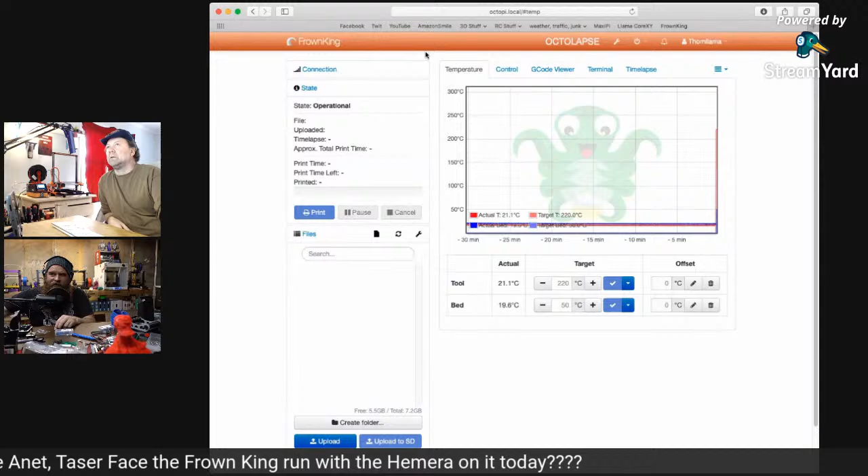Seems to be working, let's heat it up. Yeah, it's under, let's see, line number. That's one thing, people who actually know Marlin are like 'I know the line number.' I'm over here like, I can scroll to it.

Okay, stop sharing screen, let's see here. Oh, I can just do a Control F and then do bump. Oh, as long as I have that ticker going, we can't see our names. I gave you a bump of 2 millimeters on there.

Yeah, it needs to be more. I had that problem on occasion with it. I built in a fine adjuster for all my Z stops, you can't really see it because it's so far away. I do it with all my printers. The problem is the switch that came with the ANET, the stock ANET switch, has this really long handle on it, and it's not lifting it enough. It's super accurate, I found out, because it's so long it's finer at the actual switch. But it doesn't lift it enough to trigger it every time. It's right at that point where sometimes it works and sometimes it doesn't.

Yeah, I've been there. That's why everything's on sensorless and probes now. But then if the probe fails, it goes stupid. I can control F all day long. I can control F too. Actually, I can't, because sometimes they say F all the time anyway. I can't control it.

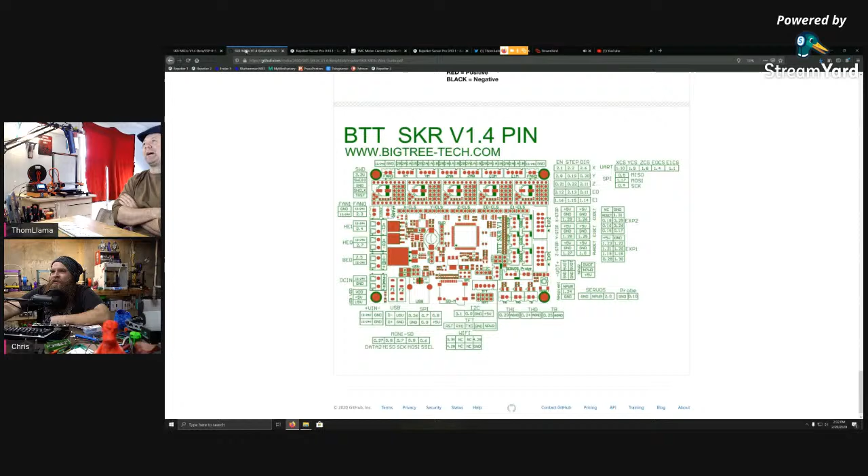Okay, that's climbing really slow even for this thing. Good, hopefully it just works. It should climb faster.

Is your screen still bugged out? No... oh, maybe it is. Huh, because I see me moving. I don't see you moving on my end. That's weird. I think my camera locked up.

Hey, it's me. And it's the llama, he's very dark, he didn't turn his lights on. Instead of a thermal runaway, he just shorted out all his house power.

I have mine hooked up to a Pi, so the Pi is mounted to the back of the 7-inch Pi screen, and that's it. I run them all on Ethernet, but you can run them on Wi-Fi, it's the same. And you can run it off like a cheap PC.

I've been pretty good, and we're back. Hey, it works, it was a Brave error. I've been playing with Brave browser. Oh, I have Firefox on this one. I don't like Chrome and I don't like Edge. You realize Brave is Chrome.

Well, sort of. If I open up basically 20 Chrome tabs, my computer doesn't struggle in Firefox. If I open 20 tabs in Chrome, I know, everyone loves Chrome. That's the only reason I keep going back to good old Mac Safari. Chrome is a freaking resource hog to the max. I mean, it works beautifully, but it's a resource hog.

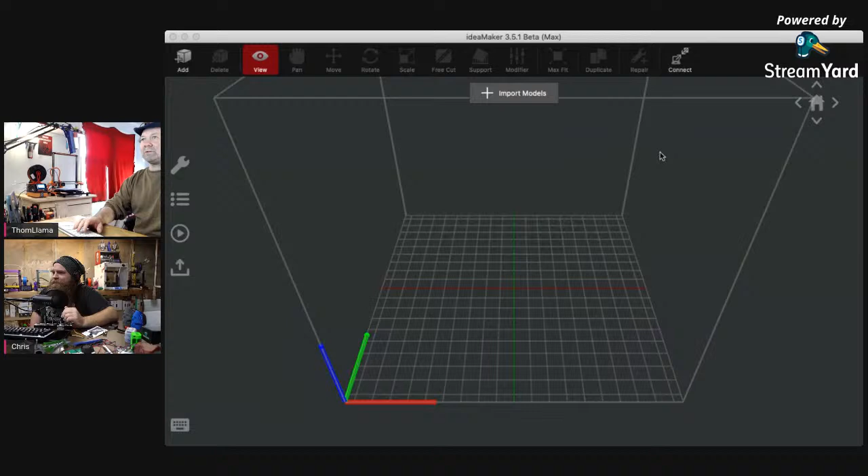Perfect. Advanced, general, what else am I missing? Rectangular, Marlin, distance from border - I don't care about that. This is... what's funny is I can't see your menu that you're clicking on screen. Oh, it's not showing up? No, I just see your mouse moving around. Well, I'll just share the whole screen then. I thought if it did the application window, it would work. Don't need that. Where's my ideaMaker again? There we are, now I can see it.

Okay, extruders 1, based on the PLA, default action, export to local disk, advanced. E-steps are fine, I'm not going to play with those yet. Primary extruder, everything's good. Continue. Finish. And there's my printer.

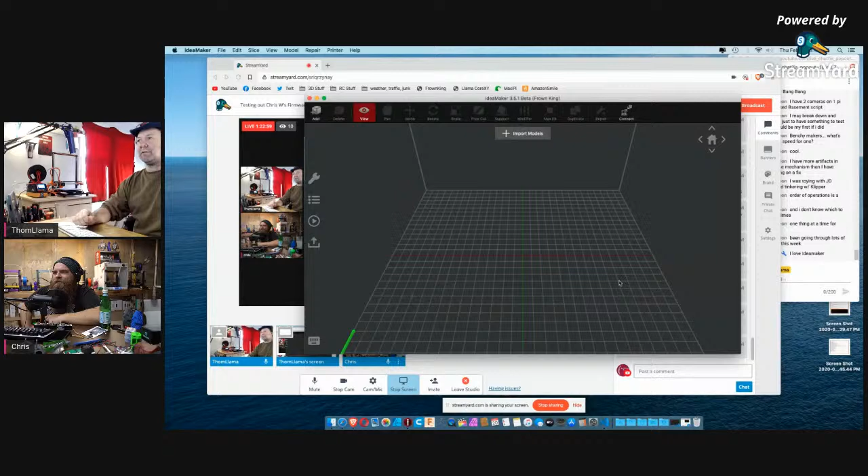That's how fast you set up a printer in ideaMaker. I just cheat in Prusa Slicer - I just go, I'm going to use this setting and just change a couple values for a new printer. They're all about the same. Everyone makes a big deal about setting up the printer, but the basic setup is just: what size is your nozzle, how big's your damn printer?

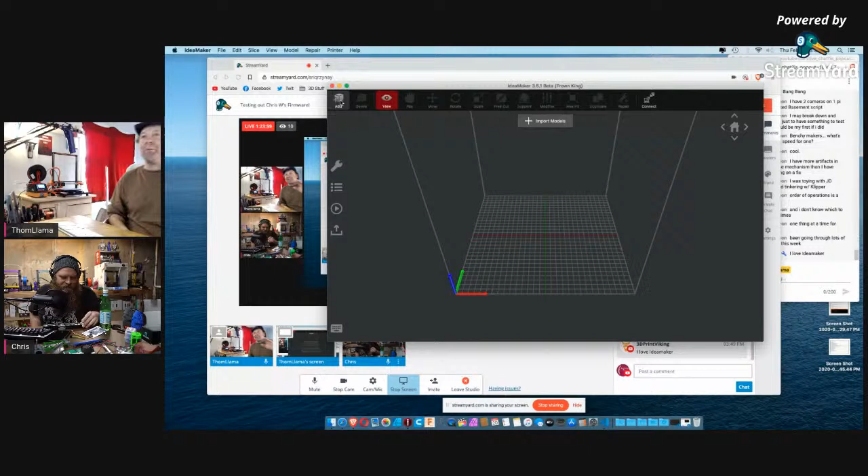Yeah, my issue with Prusa Slicer is there's no just like 'make a new printer profile' - it's always, I have to copy another profile and make it. I'm like, just give me a base zeroed value thing. ideaMaker does that similar, because most slicers slice according to your printer, but ideaMaker is all based on the filament. So all your filament profile is your whole profile. The only thing that cares about the printer is how big is it and how big's your nozzle - that's really it. Huge bed, whatever - it's all it cares about on your printer. Everything else is based on the filament.

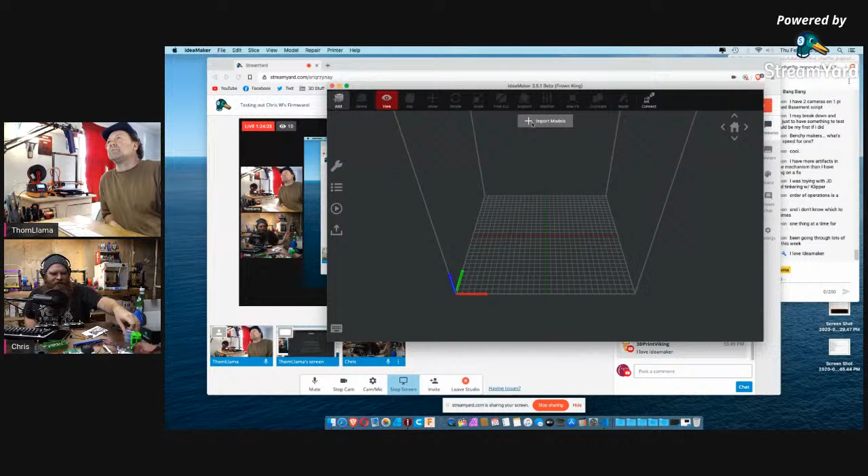But you can't even start until you base it off of one of their filaments. Yeah, I saw that - everything in the world is based off of one of their filaments. Now you can edit it and everything, but I don't want to base off your filament, I want to start with my own from scratch. Yeah, I just want a zeroed value thing. It keeps warning me when I forget to add something, which is just a pain in the butt on them to make. Gosh, I get so much... where is it?

Z-stop mirrored, that's the one I want. Because my Z-stop arm did not print so well, I was using the crappy filament. So I'm going to print my own new Z-stopper guy.

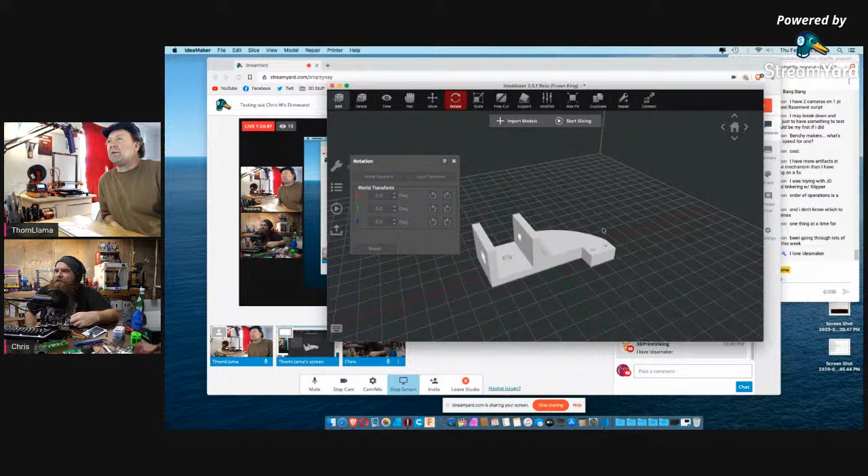I gotta admit, I love that dark gray and light gray combo on that. Oh dude, there's the last couple updates to ideaMaker have improved it immensely. I mean, just the whole...

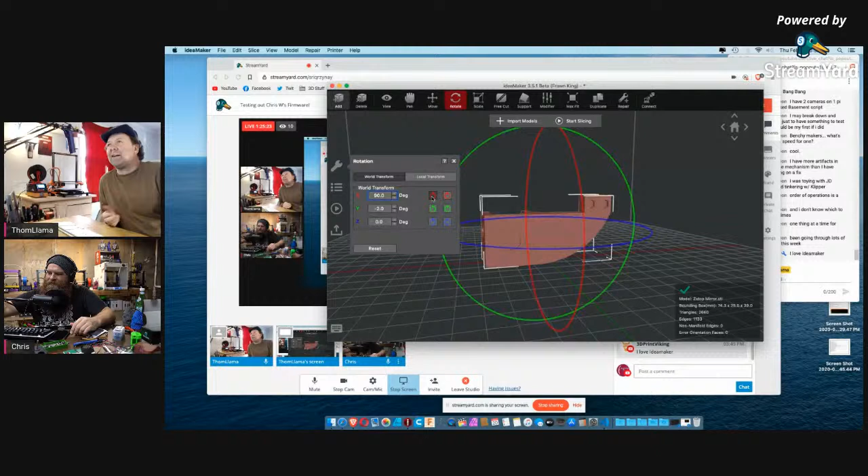I mean, I like Cura, but the one thing I hate about Cura is when you go to rotate something, there's no easy rotate - you gotta sit there and actually drag it by the little wheel, try and get it right. It's just a pain in the butt, there's no readout, you know what I mean? Welcome to the future - this is just like click, click, I want it there, I'm done. It self-bed levels. The whole interface on ideaMaker has far surpassed all the other ones as far as I can say.

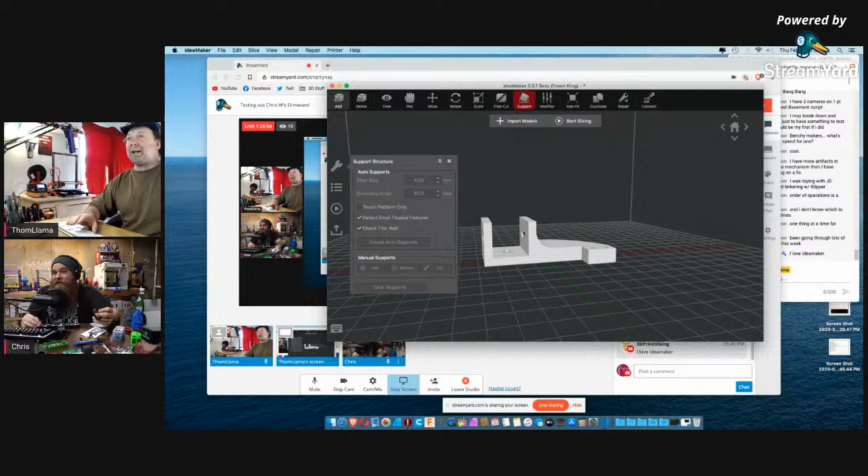The other thing I like about their interface - Prusa Slicer's supports are freaking miserable. They can be very miserable, I hate them. This has the exact same setup for supports as S3D, and it's not S3D, which is the best. I can manually sit here and add supports anywhere I want them - that's the only thing I ever liked S3D for.

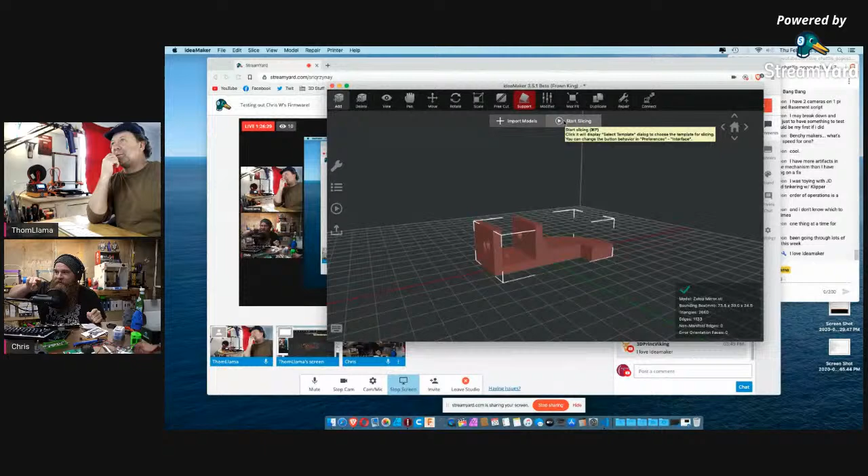Yeah, I love how they do it. I think one of my favorite programs for supports is Craftware for CraftBot. Oh God, see, I hated it - I like the support, I hate the program. I love their supports because it's like click and you can drag it at angles, so you can make the support at an angle off of something. I'm like, this is freaking brilliant. Like, or you do 2-point - I want to support here, but I want to connect from here. I'm like, why doesn't anyone else steal this?

But the actual slicer was horrid. I'm like, why is everything so slow? Why does it have a sky in the background? What is this nonsense? Actually, I need to install that on here.

Another good one that's fun is the one from Zortrax or something they make - I think I have it on this computer. Never even seen theirs. Oh, there's ideaMaker, there's Simplify 3D, there's Mesh Mixer, FreeCAD. I guess I don't have it installed on here. There's another slicer for one of those weird printers, and it's awesome - the look of it is awesome. I don't prefer it as a slicer, but it works.

Waste mode, extruder - this has got to be 6.2. Enable retraction, I don't actually need that. Oh right, because I based it on the max micron. I should have based it on... oh no, that's all right.

Infill pattern, I do not want concentric. Let's go with something like gyroid, just for giggles. I need about 4 and 4 because I want it structural.

Now this is one thing I don't like - they added this new top surface and bottom surface part. What is the difference between the top solid fill here and the top solid fill layer here? It's the same thing, isn't it? I don't know. I don't get it, I watched their video on it and it made absolutely no sense to me.

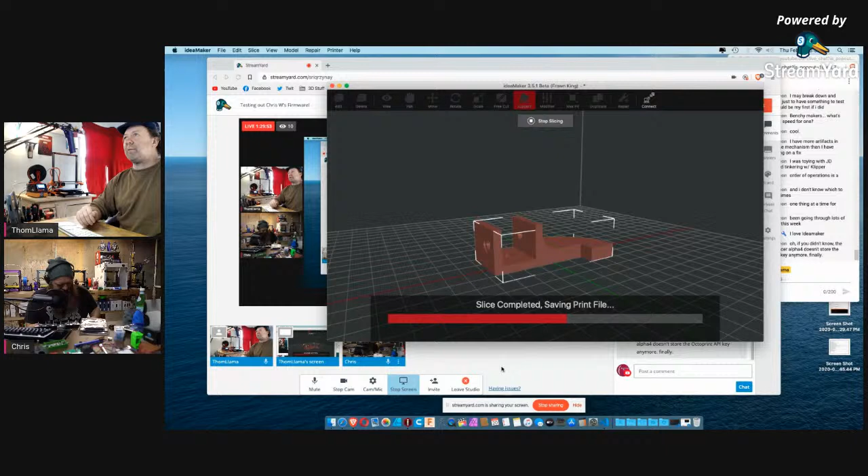Perfect, and it ported over my whole start. So, save. Okay, I should be ready to slice. I'll do it - 1 hour and 4 minutes.

Preview, let's see how it looks. Oh, that's pretty, darn good to me. Gyroid infill, that looks - just doing that right there is like trippy. It's like giving me 70s flashbacks, magic beans, when I was a mushroom and pothead.

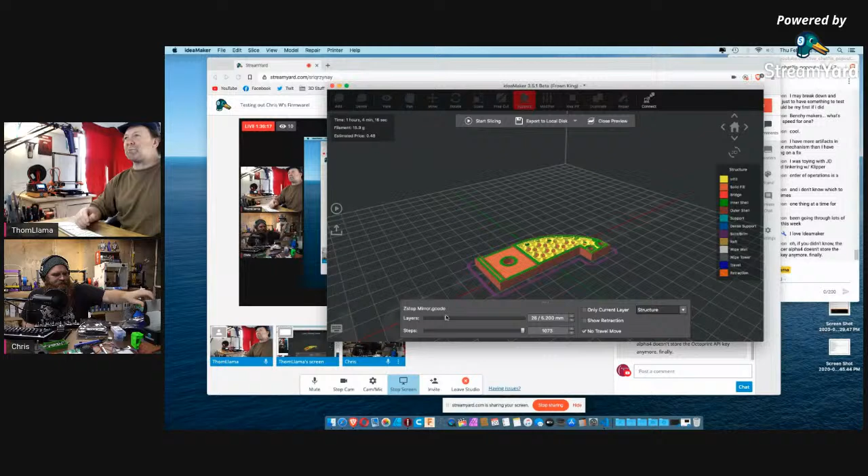Upload, there we go, let's see if it'll actually print something.

Someone knows - I love they bought these motors that said quiet, and they're not, they're just as loud as the loud ones. I bought these Winsinn motors just for cheap case fans, and it said quiet. There's two versions online, there's the quiet and there's the fan - yeah, just little 40mm fans. It's like $9 for a 5-pack. I was like, oh sure, why not?

Oh, that's the one you were posting on Twitter that actually cools. It does compare the Noctua at 4010, but anything beats Noctua 4010. I'm sorry, they're useless, they are... They're not when you're trying to cool something that doesn't need to be very cold.

You know what I didn't do? I didn't actually level my nozzle. Let's see how close I am - 4. I may need to reset that bump because that's a little high and a little slow. Go to 4. And I'll tell you what, it's giving me an almost perfect prime line. So...

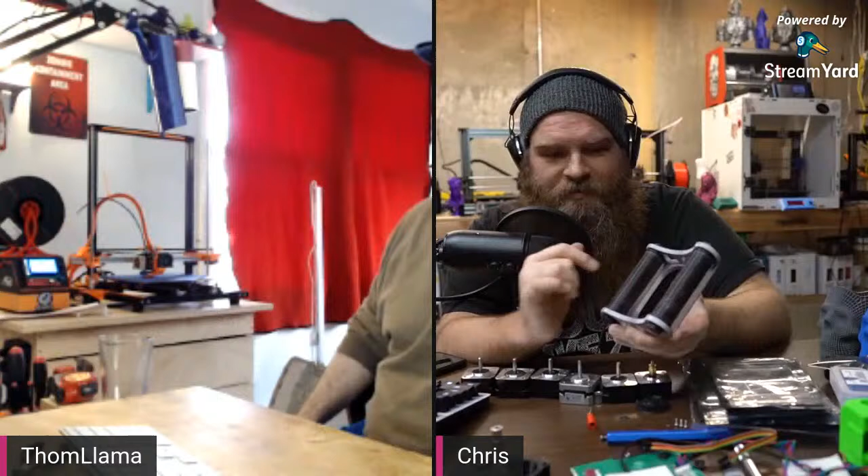Raise it up, hit print. See what happens now, it's going to yell at you. It's too perfect. Well, I have a feeling I got to reslice it because I had the override on there. A lot of these slicers like it to go to 90% extrusion rate instead of 100. And I left the 90% override on the slicer, and I probably shouldn't have.

Yeah, I need to write down what else I got to do to this thing. Let's see, that 7mm bump is too much.

You went to 7? Crazy guy, yeah I went to 7, remember? Oh, you went to 5. No, I went to 7, because I was worried it wasn't enough, I think it used to be 5. It was 2, it was too short. Yeah, 2 was definitely too short. But I was having problems with it because I think the stock was 5. I was having problems with it not being enough, but that's more than enough now.

Because it's lifting it. Well, you know what, it doesn't hurt anything, I think we'll leave it. Don't break what's not fixed. Well, it's really slow. There.

Is it printing? Yeah, it's printing. It was printing before, it just went. It almost looked like it was trying to print a raft. God, I didn't have raft on, did I? Maybe you did. I've done stranger things. No, there's no raft.

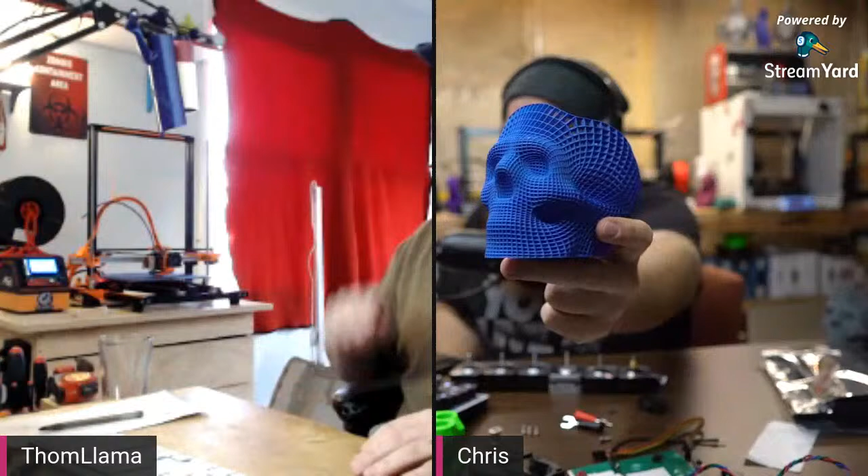That came out freaking awesome, dude. That's that matte forge matte blue. I love that matte filament. It's crazy, what filament is that? Matte forge. They're matte PLAs, printed at 205. It's perfectly matte, I'm like, this is so fun, and it's heavy. Compared to a regular PLA print, just much more dense.

They make really good holders for my tools. I can't see, I need my glasses. I'm old and blind, I'm getting there. I'm trying to catch up. Let's see here, what else do we got?

Hey, here's the filament sensor. Why is that in a cup? I wonder if this mat is just toast.

I know you're not the biggest fan of Jim, are you? I don't mind the products, I would shop on his site every once in a while.

The green, there's a oh, this green, this is Atomic UV Green PETG. It's very green. Yeah, that's green. That's almost green like this is orange. I wish the camera would pick this up, you have to see this orange in real life. There is no camera to burn your eyes like that orange does. Yeah, the website's better, they got new pictures up of the filament, I think the orange has a new picture. This whole printer is now that orange. Yeah, and it's crazy, like I have a spool of that mystery orange over here, and it's like, wow, that's neat. I'm wondering if I turn the lights off, if it'll glow for like 5 minutes.

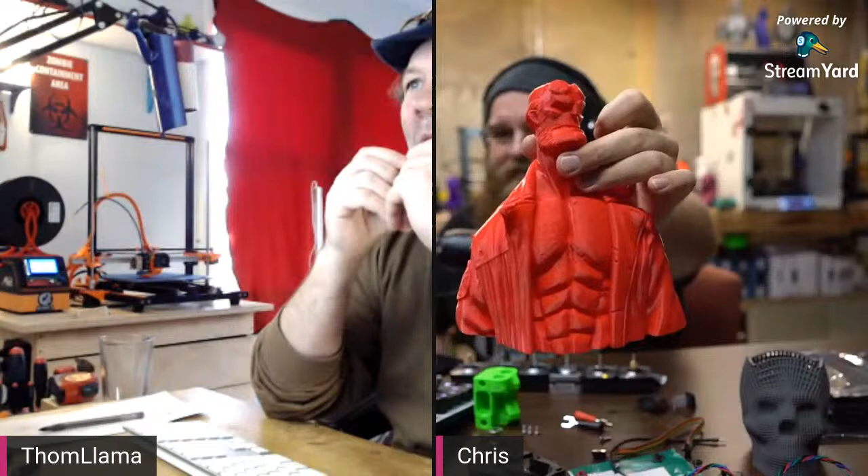This red doesn't show up on camera very well either. This is their red from printed solid. Yeah, I haven't tried their red yet. I used to get Modestro or whatever in Canada through printed solid. That was the best red I ever had. They don't have it anymore. I keep emailing them and they never answer me. They're gonna get it back. They have the other colors.

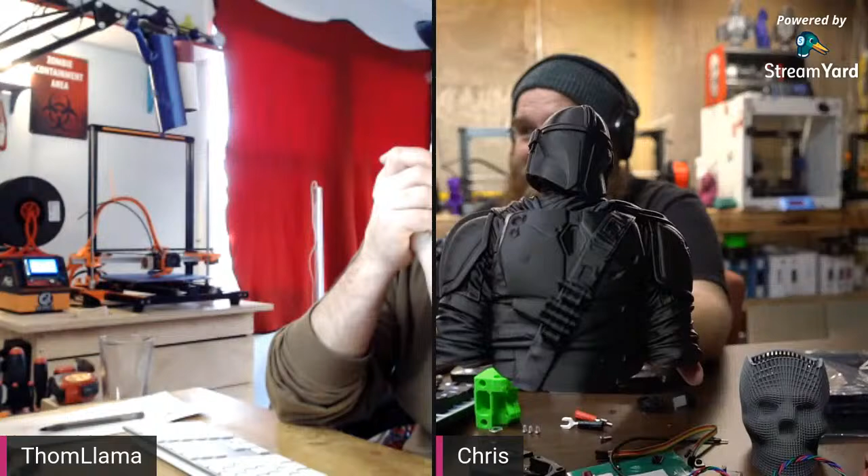That's all HTPLA too, which I'm a big fan of HTPLAs. They got a bunch of glitter too, because you have to have enough glitter filament to choke someone. I got a bunch of protopasta and I very seldom use it, more because that's the only thing I hate about having the fancy filaments and black. I never want to use them because I always want to save it for something special. I just burn through it, man. There's so many rolls, like again, I need more like 1mm nozzle printers so I can just burn through some of this stuff. I can't afford to, it's that simple.

Oh man, what else is left? I've slowly made this mess go away, but I can't reach my motors box to put all my zero pancake motors. I gotta release that air duct too.

Don't do it. Well, come to find out, I don't know if you saw my other video, I did a special air duct for the Hemera, for the part cooling, and it fits beautifully on my one over here on the Duet with the Hemera over there. Anyways, I don't have the E3D nozzles.

I'm using all micro Swiss nozzles. Yeah, they're a bit longer. Micro Swiss nozzles fluctuate like a 0.5 millimeter. Yeah, they're longer and they're also taller. That air duct on that one, it was too low to the bed.

Yeah, because... print another one. On my Hemera, I printed an adjustable fan shroud. Yeah, that way you can move it up. I think it goes up and down like almost 3 millimeters in both ways, so you can set it, because I have a Volcano on mine. Oh, I was gonna say you should try my thing, but it won't work with a Volcano. Yeah, Volcano's tall, but I wanted to put giant nozzles on that because it's a 400 millimeter tall printer. I don't want to sit there with a 0.4 millimeter nozzle all day. No, I run all 8s, but that's got an 8, and this has got a 6.